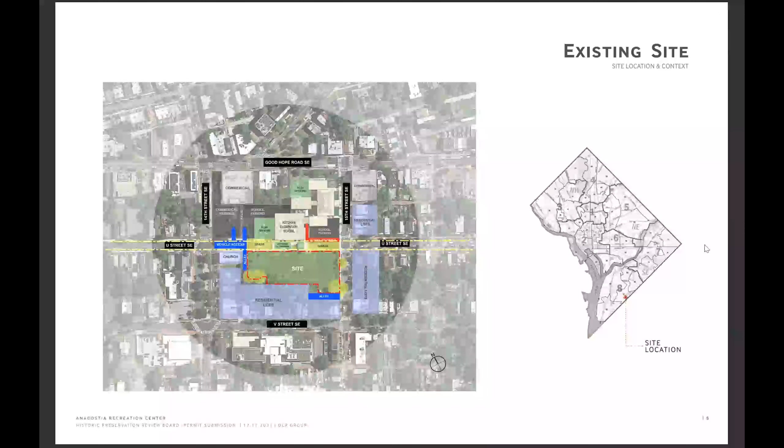As Rachel mentioned, we are within the Anacostia Historic District. This dark line represents the boundary, and you can see that we're just right in the historic boundary, which made us subject to Historic Preservation Review Board approvals. Interestingly, Ketcham is outside the boundary but is obviously an influence in the development of the site for the new recreation center. You can see the site is a little bit oddly shaped.

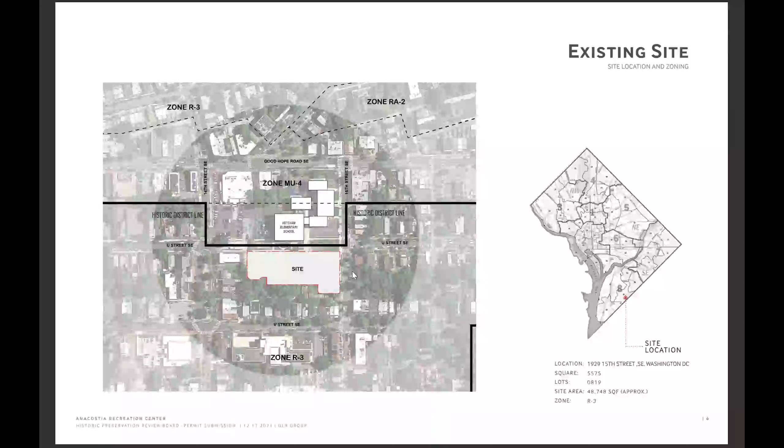Typically when we're looking at rec facilities or park facilities, the ideal layout would be something a little more open. In this case we have a somewhat linear site with unique geometry to work around with the program. This is a historically designated zone, which factored into the development of the design.

Here's an aerial view, so you can see the Ketcham School, the green space adjacent to it, and the context of the neighborhood—the residential areas, a church, a historic old market, and the commercial corridor on Good Hope Road. You can see, with this dashed white line, the U Street continuation from 15th back to the 14th Street side.

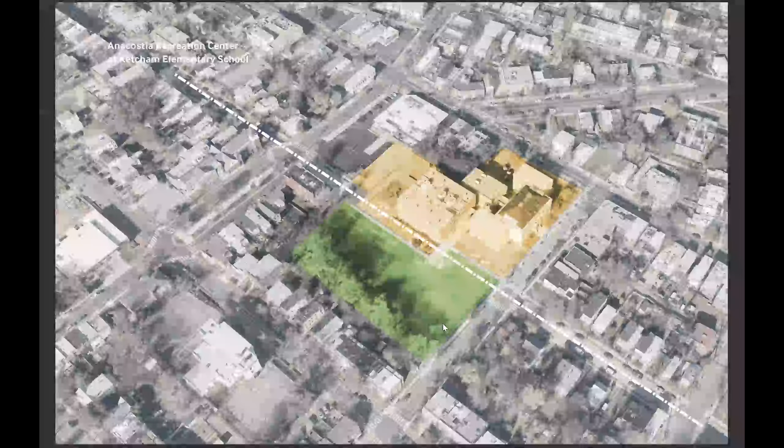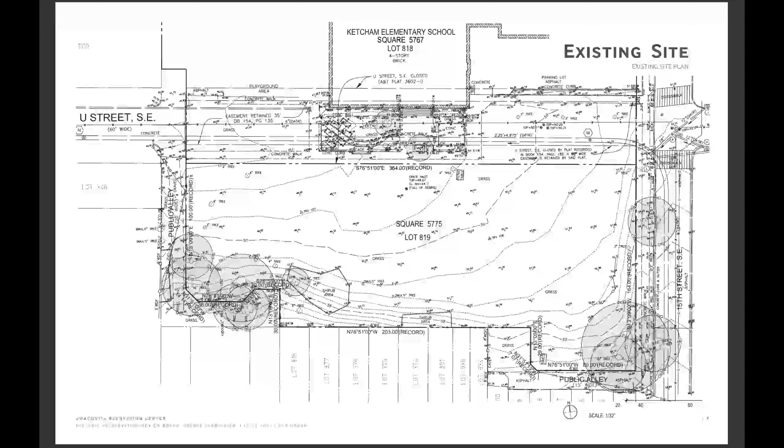Once this thing loads, you'll see the topo. There's always a challenge on every project. In addition to the unique geometry, there was also some topography to work around—about a 10-foot elevation change from the northwest corner down to the southeast. So where you site the building, making sure it's accessible from the approaches and the public way, was something we had to work through with our civil engineer and with the grading.

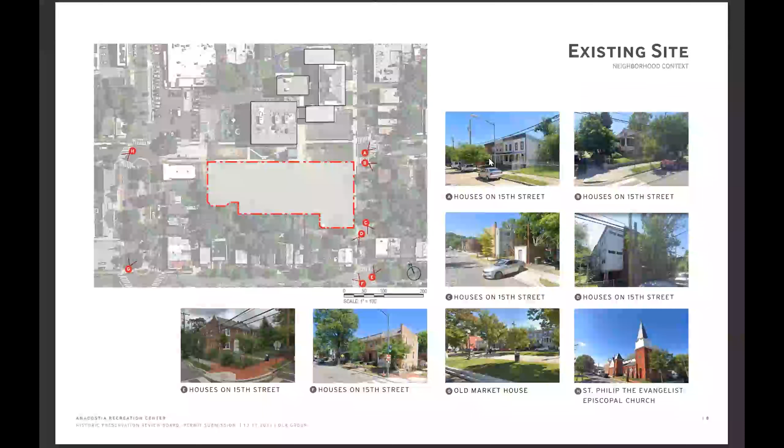Here's some of the neighborhood context, mostly residential. You can see the scale and nature of the buildings on 15th Street, which will serve as the primary access point and front of the facility. It also serves as a frontage for Ketcham Elementary. Here you can see other uses like St. Philip Church to the west, low-scale apartment buildings, but also some historic row houses on 15th Street that are contributing structures to the Anacostia historic fabric. Here's a streetscape of 15th Street to get a better handle of the architectural context.

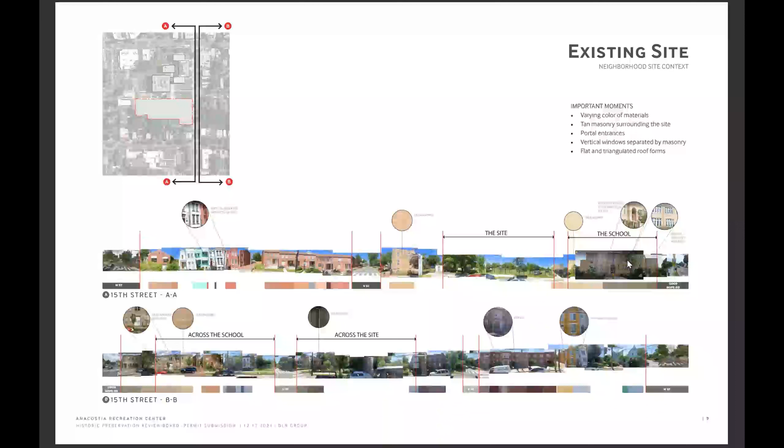Ketcham is on the north of the site. Here you can see the open green area—right now it's just fenced in. Walking down 15th, you see the big open space, then transition to some of the low-rise apartment buildings. Of note is the various approaches to exterior materials: brick, wood siding on some of the older buildings, and a range of colors from light blue to traditional brick to yellow, and Ketcham has that yellowish color too.

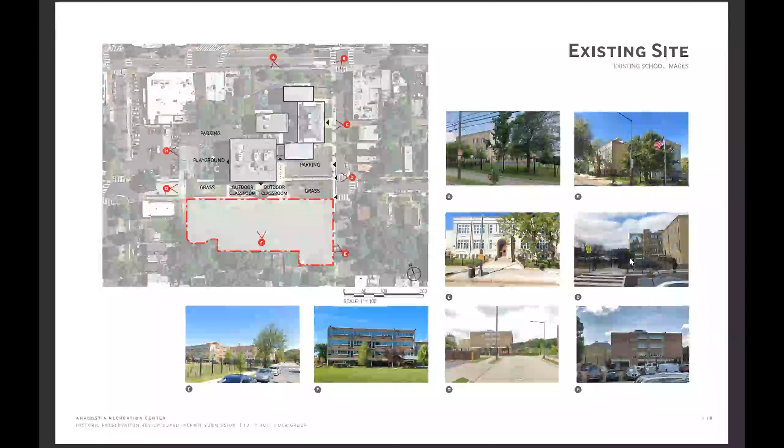Here are some images of the school. The original building was built around 1908, so it has a fairly prominent, fairly civic presence. You can see the addition from the 60s, right off the open field play area, and the access to the school from 15th Street.

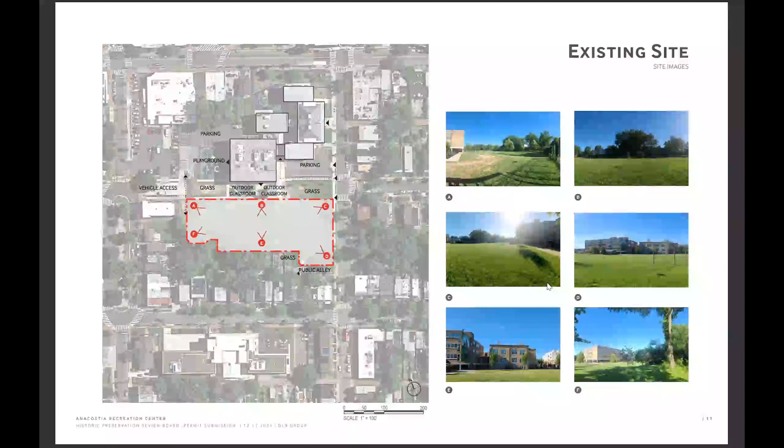Because this is a historic district, we had to take note and be mindful of the historical typologies around the neighborhood. Primarily the row houses were the main contributing structures we encountered within the historic boundary. Not much civic precedence, but we did have Ketcham, although it's technically not in the historic zone. We also have DC Prep, a block or so south of the Anacostia Rec Center site. These two served as references and guideposts for the development of the building design, along with some historic commercial frontage a few blocks away. So in terms of finding a fit within the fabric, these were considerations we had to make, citing pre-existing civic precedents but also taking cues from the residential lower-scale buildings.

Since this is a community facility, a major component of the design development was ensuring strong engagement and input from the community and other stakeholders. Early on there was an extensive programming and visioning series of activities, starting with meeting with DGS and DPR to ensure alignment with their overarching goals and objectives. Because of where we are in Anacostia, the neighborhood was very keen on having us ensure the facility be a safe space and account for heightened security. That was echoed across all the channels we interacted with—DGS, DPR, our collaboration with Ketcham School, and other community groups. So the sense of safety and security was considered a non-negotiable objective.

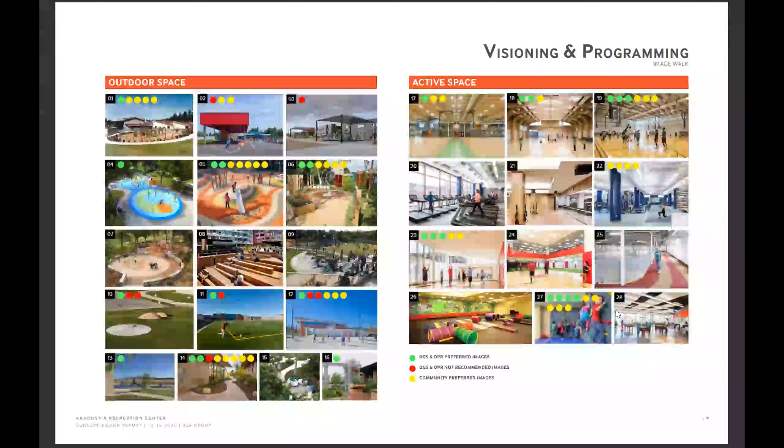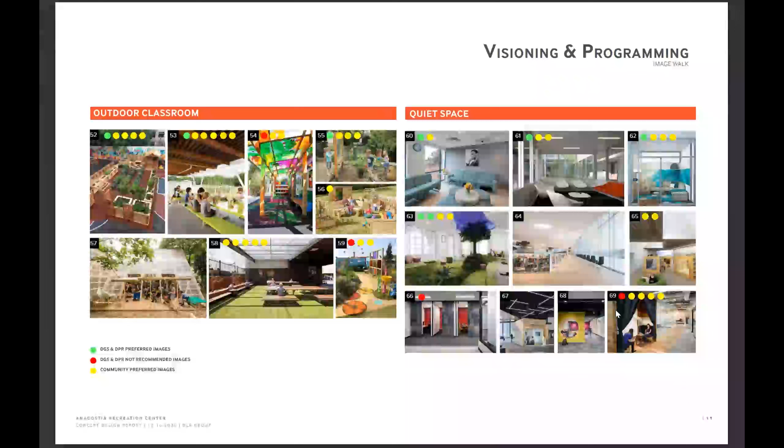We went through our imagery walks with the community. Back then, it was all virtual, so we didn't have the benefit of meeting folks in person, but we made do as best we could, showing them images to get a sense of what the community liked and did not like, to inform development of the design. We looked at specific types of spaces: gathering spaces, educational, outdoor classroom and meeting areas, and spaces for quiet and respite.

At DLR, we've established and developed a values workshop which addresses sustainability, to ensure the community's thoughts on how they want the facility to function within their community are addressed, whether it's energy use, well-being, or drawing from nature. We share topic cards, and at the end of the meeting come away with goals and objectives. Out of this exercise, community activation, play, beauty and inspiration, community resiliency, equity and air quality came to the forefront of the priorities that the design should emphasize and explore.

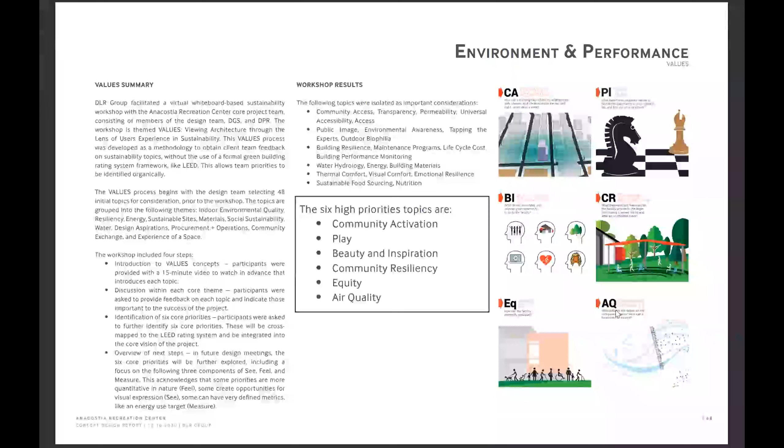We engaged the community with online surveys and got quite a bit of good feedback. Coming to the top was the desire for fitness and gymnasium space. The gymnasium and fitness room were also part of the original program that DPR put together, so fortunately that aligned with community needs. A play field and track were also desired, since we are developing on an open site, and the community wanted to make sure there was still access to that.

Safety and security also arose as a number one concern. Some of the input we got from the community was that they want this to be a beacon of hope for a neighborhood that has long struggled with security and safety, ways of engaging their youth, but also crossing the multi-generational community, making sure everyone is engaged and has an opportunity to benefit from the facility.

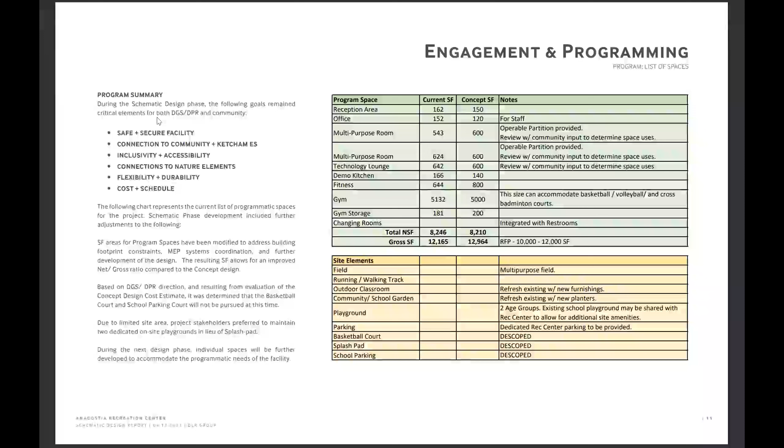So with that, here's our program. Rachel mentioned the scale—it's not a large facility, only 12,000 square feet, of which a good chunk is the gymnasium. So how we make this flexible for various uses was something we needed to work through. The original program includes a staff office, two multi-purpose rooms that can be joined as one or separated via operable partition, a tech lounge for youth activities, and a demonstration kitchen. That was something the community was interested in seeing in the surveys, where they can do classes and kitchen demos, plus the fitness and gym.

Out on the site, there's a multi-purpose field so the school can maintain use of it but also for community use, a walking and running track, and an outdoor classroom area. Ketcham Elementary School actually had an outdoor classroom, so as part of this scope, and as an outreach to the school, we included a refresh of that outdoor classroom and their community garden. And then the playground, which will accommodate both younger and older kids.

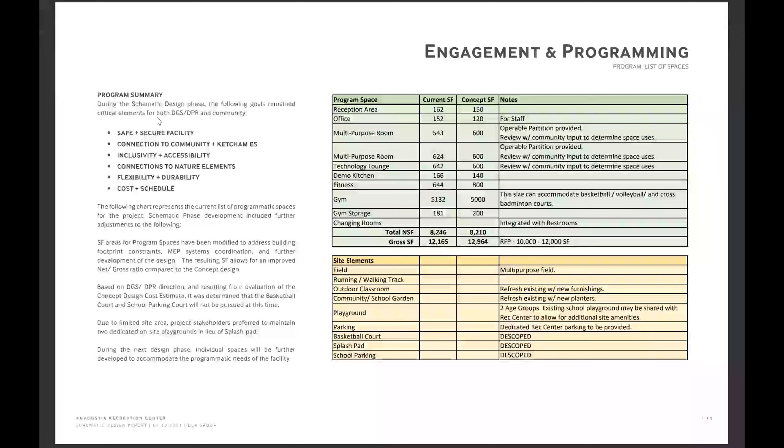Other program elements that were at one point considered but ultimately de-scoped, either due to budget or space, were the basketball court—because there's one existing and we now have the gymnasium—the splash pad, and parking, which the school was hoping they could use, but alas, there was no space.

One thing to add about our community engagement process: as Edgar was saying, it was in the middle and towards the end of the pandemic, so most of it was done virtually. But we found that you can get pretty large participation in a virtual community meeting, because some people who don't typically raise their hand and speak in public are much more comfortable contributing virtually. They can raise their hand, put things in the chat, or provide those dots virtually. So being virtual, we actually received a lot more feedback from the community.

Just as a comparison, our last community meeting was held in person at the Anacostia Library, and only a handful of folks showed up. It was a very productive and lively meeting and discussion, but it gives you a sense of how accommodating a virtual meeting can be for a lot of folks in the community. All right, moving on to site planning.

As I alluded to earlier, one of the things we wanted to explore was this reconnection of U Street, because they have this long site and opportunities to access it from 15th Street, but also the U Street intersection towards the west. It's how do we reconnect and make use of circulation across the site, connections with the school and public access.

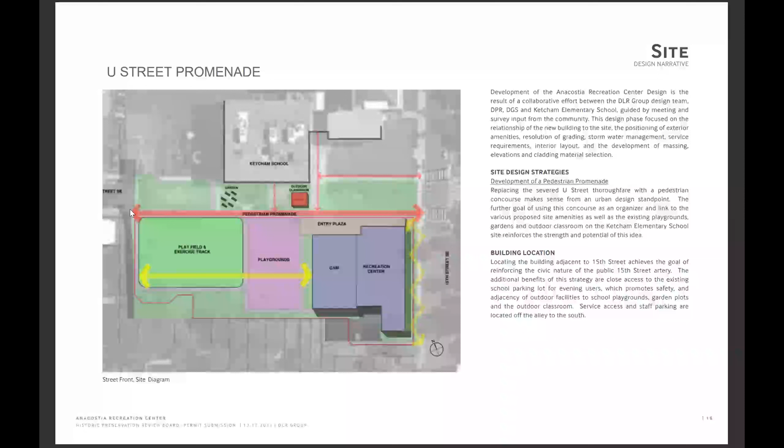And then there's access from the west side through a gate, so you'd be able to access it from either side.

In terms of the programming, this is the arrangement we landed on. For the building itself, since we're fronting 15th Street, all the activated spaces are along that end of the building, with public access coming from the corridor, from the promenade.

There's a secondary school access to help provide dedicated access, since they'll be accessing mostly the gym in most cases. Then service access—we had an alley to the south that was able to accommodate the parking spaces for the facility, trash access and handling, but also the utilities. All the Pepco and gas lines are coming in from the south side.

And then on the outside, you have the school and the interconnection between the playground and the fields.

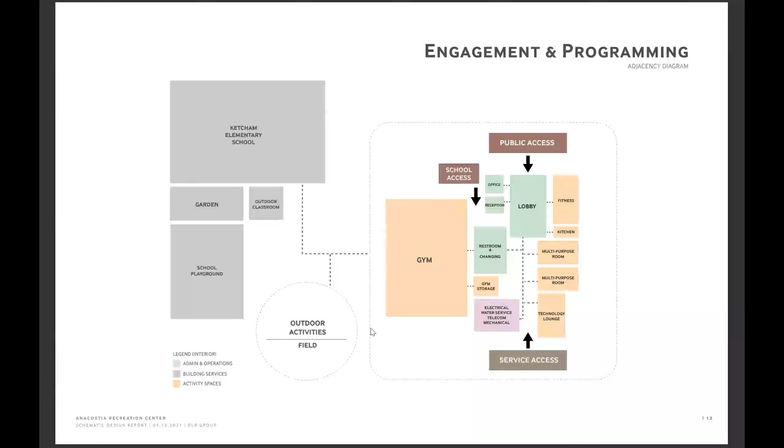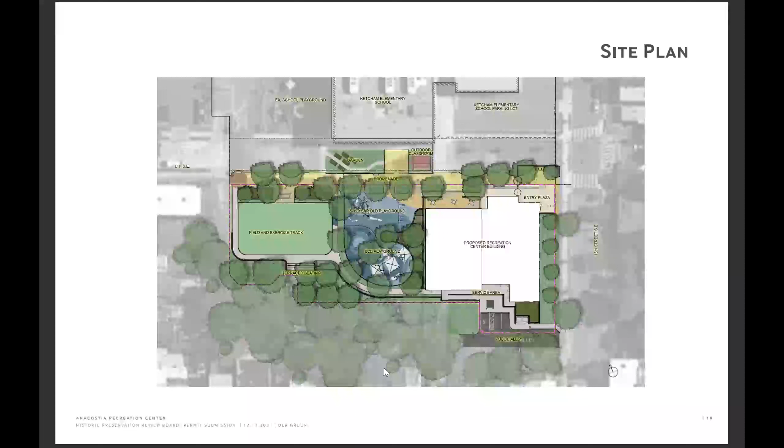All right, highlighting the entry plaza. It was important that we had a prominent place of entry to introduce the building and access to the promenade. In our discussions with DGS and working out a program for Art in Public Places, we've created this entryway that features decorative metal panels an artist will create imagery for.

This accentuates and highlights the entryway as a deviation from just regular metal picket fencing—something more decorative, more welcoming and visually interesting to draw folks into the entry plaza. We proposed pivoting gates that would open and really open up the promenade, as opposed to single man gates that would seem more prohibitive.

So again, you see this balance between really trying to address the security of the site, but at the same time maintain it as a welcoming destination.

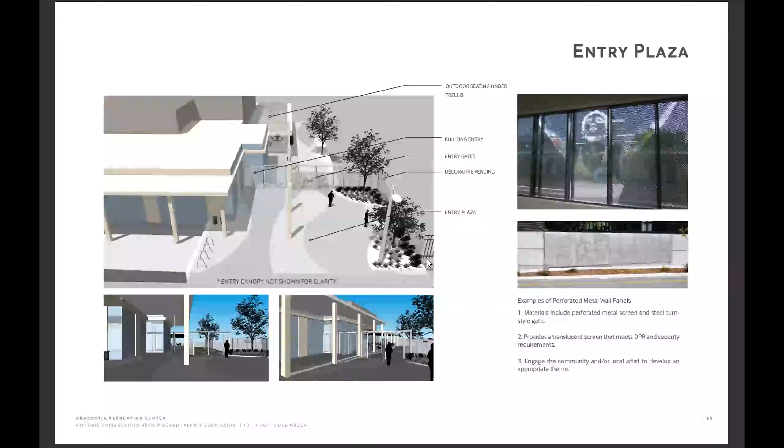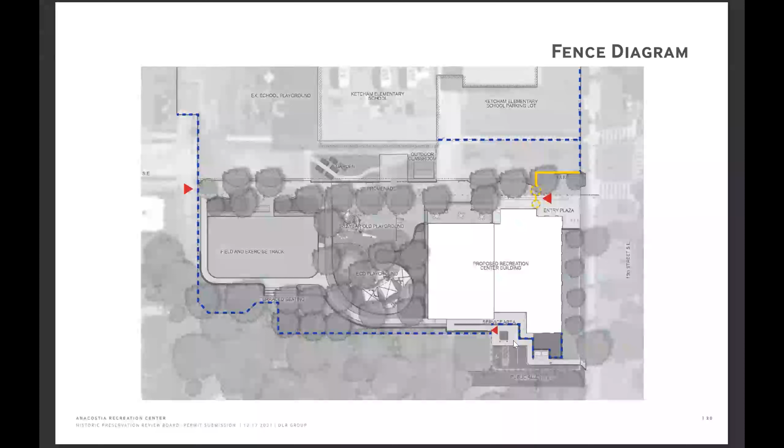Speaking about security, it was important that we highlighted to community members, since they were concerned about security, how we were securing the site—fencing all around, continuing what's there. Access points are limited: the entry plaza on 15th Street, the west entry off the U Street intersection, and the service access, which would be limited to staff.

Moving on to the building design. As Rachel mentioned, this project had the full slate of agency reviews subject to it, starting with the Commission of Fine Arts, being a DGS funded project, and the Historic Preservation Review Board, because we were in the Anacostia Historic District. The Office of Planning established this pilot program for design excellence reviews.

They had a committee of local architects brought in to critique and review the design and offer input—that was a fruitful interaction with them. And then some of the neighborhood groups, like the Historic Anacostia Preservation Society made up of community members, the ANC, going through the neighborhood commissions, and just the broader community engagement activities.

In addition to meetings with the school, the principal was pretty engaged early on and offered some great insight.

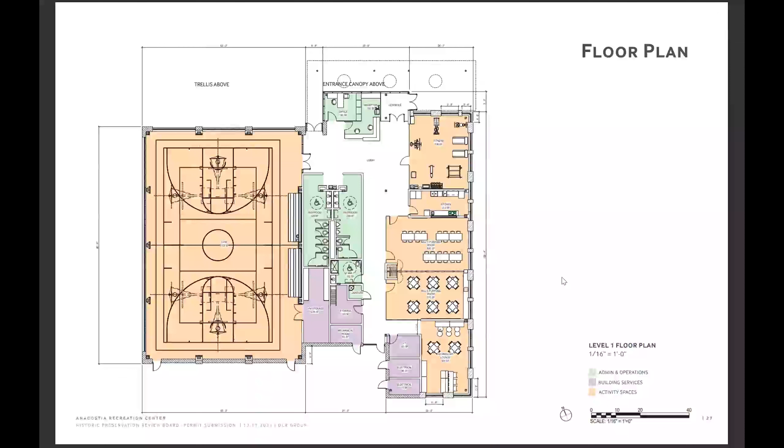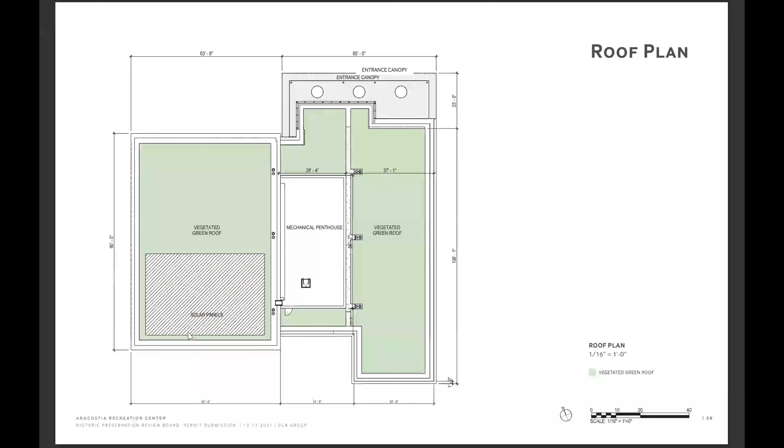All the service spaces are off of the south side, which is where the utilities are coming in. As part of trying to meet our stormwater management requirements, we're relying on a vegetated roof to meet some of that. You can see the vegetated roof on the lower portion, and on the upper portion, meeting green code requirements by including solar panels, so partly renewable.

If you remember some of the earlier images, specifically Ketcham and DC Prep, in our meetings with CFA and the Historic Preservation Review Board, the use of brick and the articulation of the 15th Street facade were all based on those pre-existing precedents, as well as the color, which we drew from the pre-existing streetscape.

With the 15th Street frontage, you have the offsetting and the scaling up as you work towards the gym. We did explore putting the gym on the 15th Street side, but the scale was a bit much for that pedestrian zone.

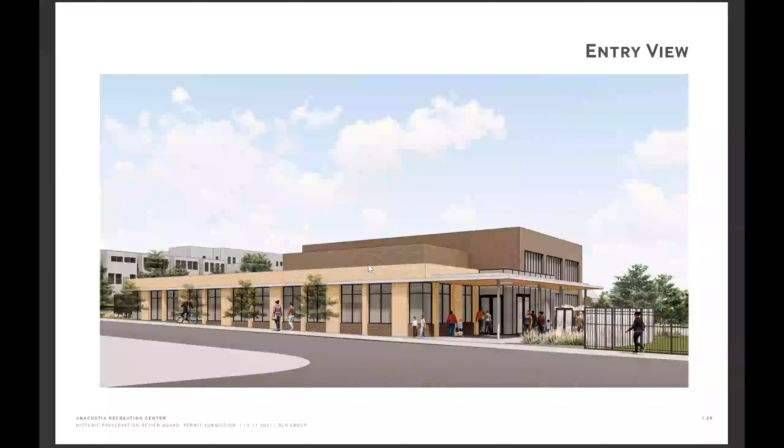So there's a bit of a step up that occurs now with the way the building is laid out massing-wise. Here's a view towards the gym from the pedestrian side. Obviously the gym is inherently going to be a big blocky mass, so we explored ways to sort of minimize that bulkiness, introducing some glazing up on the upper portion.

We felt it was also important to maintain a visual connection between the gym and the outdoor spaces, so fortunately we were able to maintain the glazing that you see here. We did have more, but that was value-engineered out.

And then just looking at ways to further articulate the brick with this accent banding, and also some of this detailing and accenting, creating different planes on the elevations to add more visual interest.

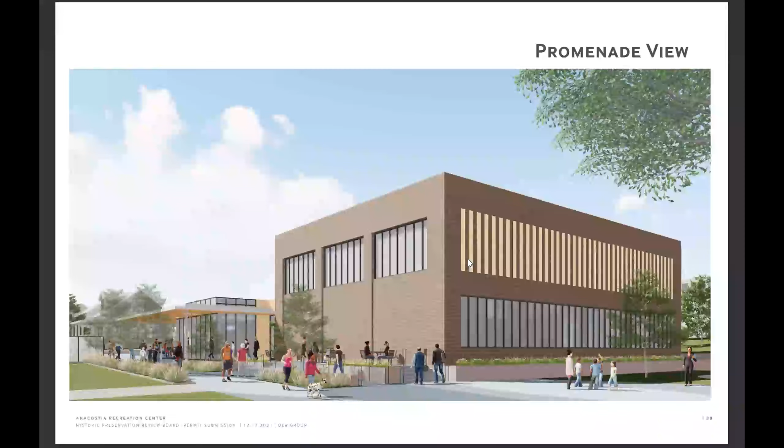Here's a view looking north. You can see Ketcham beyond.

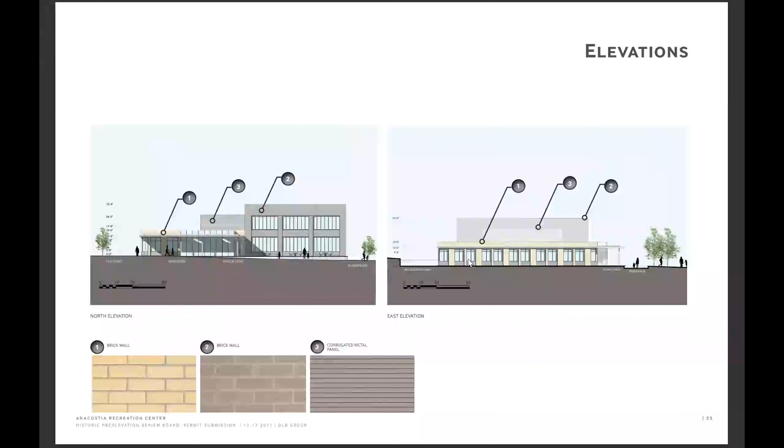And this is some of the imagery that we shared with CFA, describing the intent of the material: the yellow brick, the gray brick, corrugated metal for the mechanical enclosure.

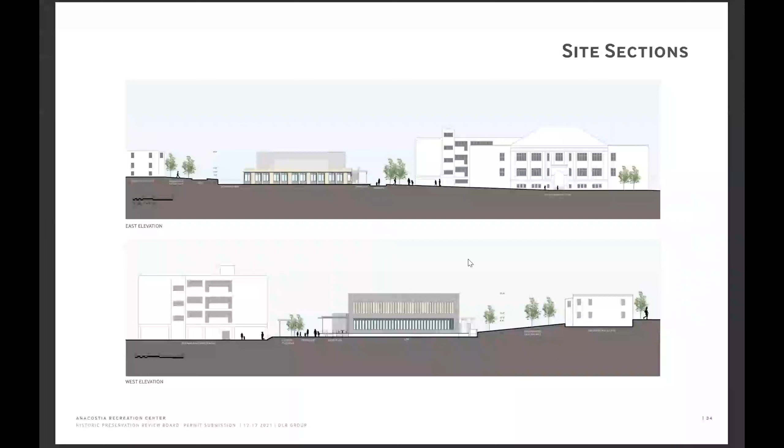And then how the massing relates to the surrounding context, with Ketcham on the north side, but the more lower scale residential on the south side, which interestingly, because of the topography, ends up being kind of in alignment scale-wise.

In our color palette and material palette, as much as possible, we wanted to integrate the use of wood, as well as using colors like blue, which alludes to water or sky, really just to have that calming effect within the spaces.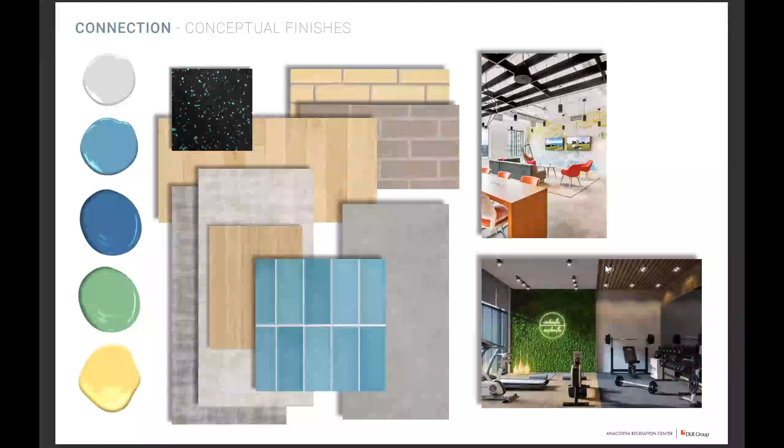Wow, that went by quick. So that's it for the presentation. I guess now we can open it up to some Q&A.

Rachel, I don't know if you see anything in the chat, or we can just take questions. No, I think we can take questions, and maybe you don't need to share. Okay.

Okay, so I guess I'll go ahead and share my screen, which is really a view of the recreation center.

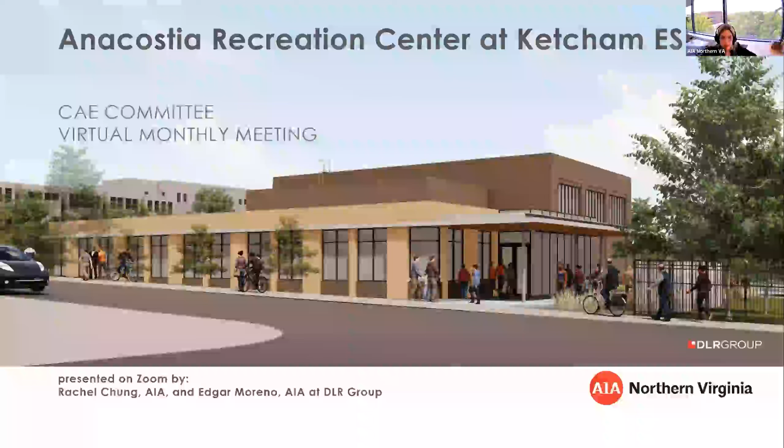Does anyone have any questions they'd like to ask the design team? I had a question about the siting, wondering if there was a concept that had attached the rec center to the elementary school. Maybe you can explain how the students get from the school to the gym on a rainy day.

Right, maybe Edgar can talk about how they access the school, but it was interesting because in the beginning site planning of the project there were really two ideas: one, the consistent idea of the pedestrian promenade connecting east and west, bringing back that pedestrian access that was closed off when the addition of Ketcham occurred in the 70s. We thought that was very strong and needed to happen. The siting of the building was either the front where it is now, or in the back to connect those areas, but for security, everybody felt that where it's sited now was the appropriate one. That was interesting, we all felt strongly about the community, CFA, and that site planning development.